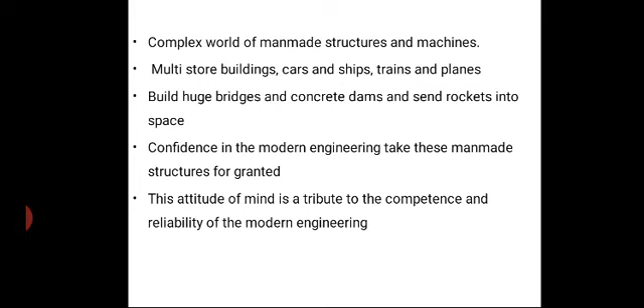This is our confidence in the modern engineering field, where man-made structures are taken for granted. This attitude is a tribute to the competence and reliability of modern engineering. This is the ability of modern engineering.

Now, for the analysis of stresses, the necessary thing is your mathematical analysis of stresses for regular bodies or regular shapes, right? But in complex components, it may not be so. In practice, all the considerations which we have made for regular geometry cannot be applied.

If there is no other way for an engineer to study the stresses, you need to have previously existing resources. But the new materials or the new designs in the practical world cannot be handled by our old techniques or old methods of stress analysis.

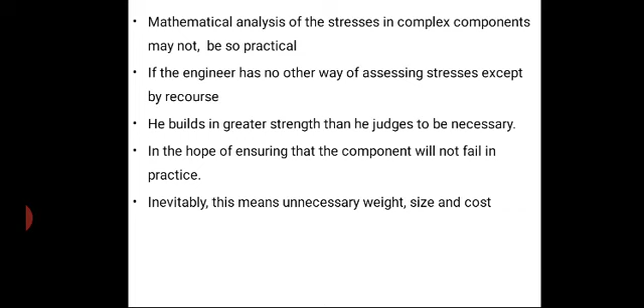Both weight and size of the component lead to high investment or material cost, which affects the total overall cost of the component, machine or other component. So it is very necessary to analyze the stresses in the components, and if we can determine the stresses in the component with minimum cost, then it is a feasible way. So in these conditions, we need to analyze the stresses in a component.

Stress analysis involves the 6 stress components, because we know what stress is. Stress is nothing but the internal resisting force for externally applied loads. When we consider a simple geometry like a circular bar subjected to an external tensile force F, everyone can say that stress is directly proportional to strain, or stress is nothing but force by area.

Now if I mount it in the horizontal direction, I can determine sigma x, the stress along the x direction. If I mount it in the vertical direction, I can determine the stress along the y direction. But for a 3-dimensional body, I need to determine the stress at different points. Then I'll consider the stress tensor, which involves the normal stresses as well as the shear stresses, in total 9 stress components.

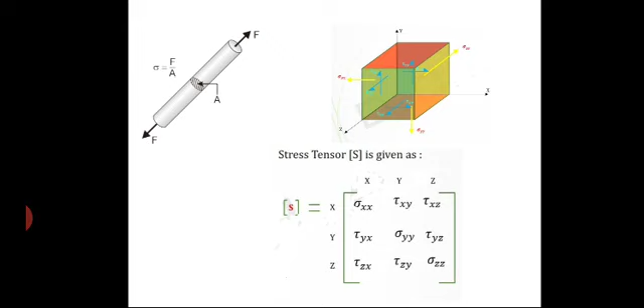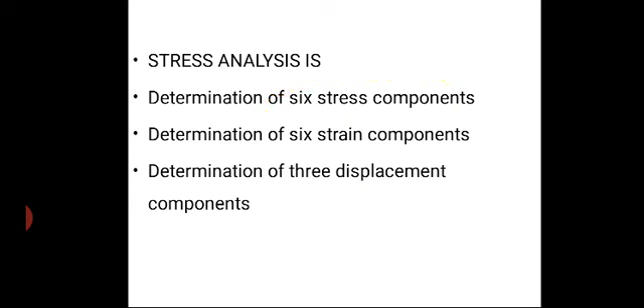But when we consider the symmetry of the stresses, the total 9 stress components are reduced to 6 stress components. Because of the symmetry, we only have 6 components. We have learned all this from our basic subject, strength of materials. Similarly, we can determine the 6 strain components in a body.

So if I need to determine the stresses at different points and different orientations, we need a lot of information, right? Even for a regular body, if I apply an axial load, I need to determine the lateral strains in 2 mutually perpendicular directions. Such a solution is known as a closed form solution.

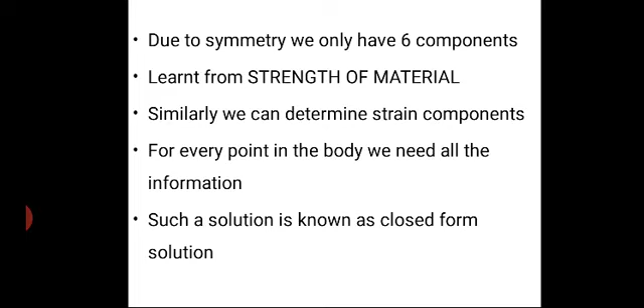Suppose I consider a problem like a plate with a hole of radius r at a certain point. In such problems, I cannot apply stress equals force by area, because the area may not be uniformly distributed, and we cannot say the stress is directly proportional to the applied load, because of the circular hole created at the center of the plate. So in these conditions, it is very difficult to get exact solutions.

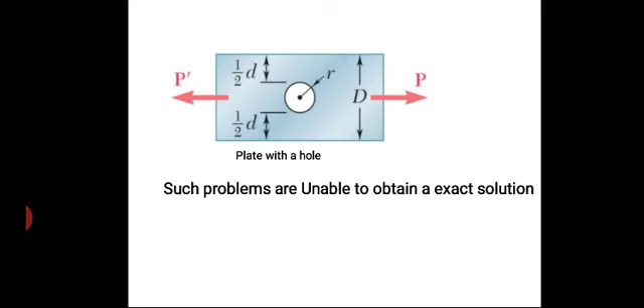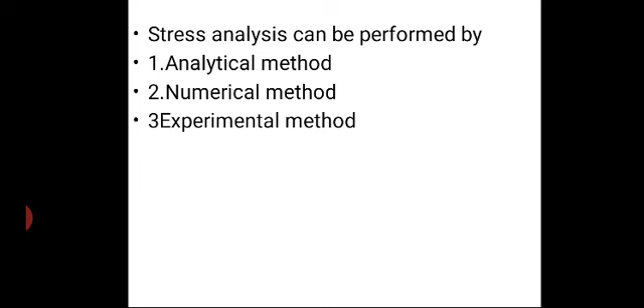So here there are possibilities of stress analysis, and this stress analysis can be done in 3 different methods: analytical method, numerical method, and experimental methods. Analytical methods are taken from our regular mechanics of machines or strength of materials, or even from theory of elasticity, where we are able to get a conceptual appreciation of the stress fields.

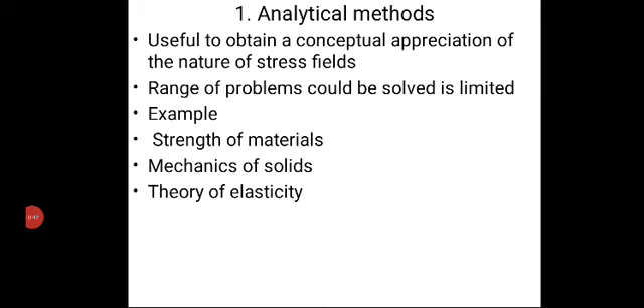But these analytical methods are restricted to solve only limited problems, regular geometry problems. They cannot be applied to complex geometry problems. Suppose I am considering a bar with axial loading and I am applying a torque, that is a combined loading. Or if I am considering a plate with multiple holes, our regular analytical techniques cannot be applied. Similarly, a beam which is being applied by a point load.

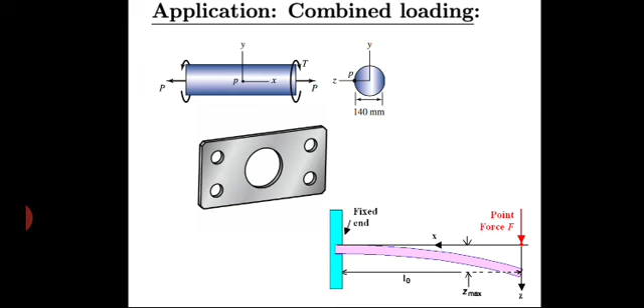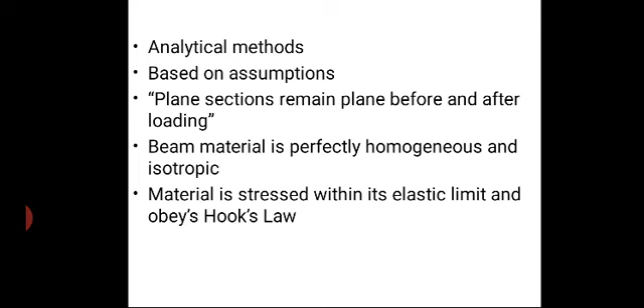Because all the analytical methods we are considering depend upon certain assumptions which we have learned from our basic MOM or SOM. Such assumptions are: plane sections remain plane before and after loading; the beam material is perfectly homogeneous and isotropic; and the material is stressed within the elastic limit and obeys Hooke's law. So analytical methods depend on certain assumptions and are limited to simple geometry and simple loading.

The second method is numerical methods, which provide scope for solving problems with arbitrary or complex geometry. The output results will be approximate values. You have learned this in your previous semester, finite element analysis. Numerical methods can be classified into three broad classifications: finite difference method, finite element method, and boundary element method. But these methods are validated by comparing the results with experimental techniques. Numerical methods alone cannot satisfy the requirements.

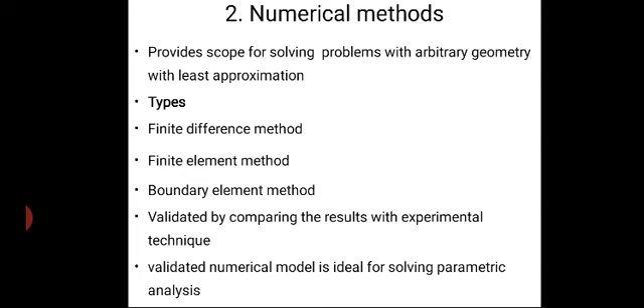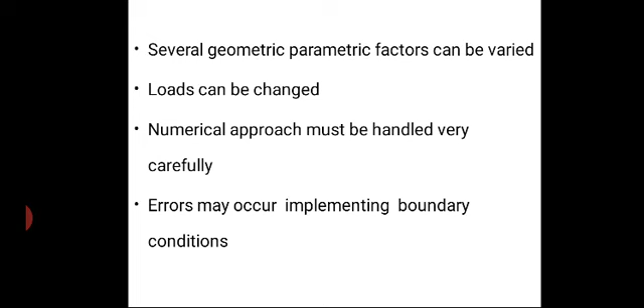Once it is validated with experimental methods, the numerical model will be an ideal form for solving any parametric analysis. This is the advantage of a numerical method compared to the analytical method. Once validated, several geometric parameters can be varied, and loads can be changed. One problem is the numerical approach must be handled very carefully, because it may give errors in the output values due to improper constraints on the body and improper locating of the nodes or key points. So the numerical technique alone cannot satisfy the requirements.

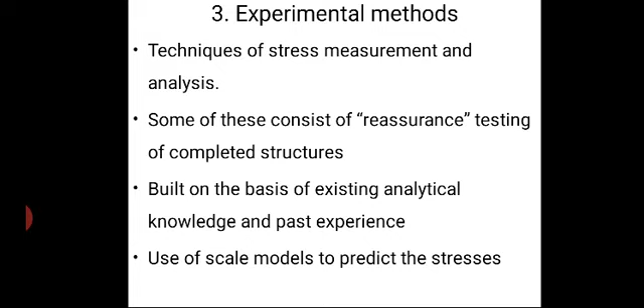To overcome this, we have the experimental technique. That is our subject, experimental stress analysis. These techniques of stress measurement and analysis consist of reassurance testing of completed structures, and the prototype of any body can be analyzed very easily, built based upon existing analytical knowledge and past experience. Large components can be scaled down and we can predict the stresses in the members.

Now let us consider one small example where a nut is tightened by a spanner. At the free end we are applying the load, and because of it stresses develop in both the nut and the spanner. For a clear picture of how the stress is distributed, we consider the material of both the spanner and the nut as epoxy. The stresses can be observed in the form of a birefringent pattern.

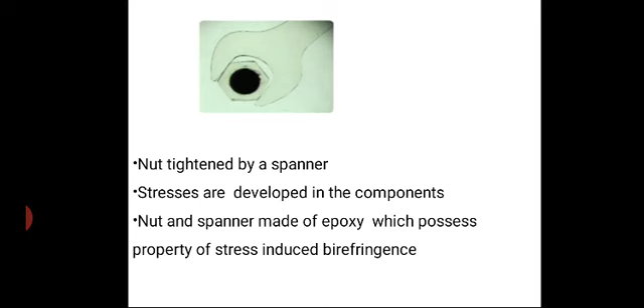You can observe how the stresses are distributed in the nut and the spanner depending upon the loading. As the load is increased from 1, 2, 3, 4 to the fifth loading, the stress patterns vary at different points. The stress concentration is maximum at this point, and you can see how the stresses are distributed on the outer surfaces.

This is the experimental technique, where we can practically analyze without implementing any formulae or numerical equations. Directly we can predict where the stresses are maximum and concentrate on these areas. Viewing the combined loading of the spanner and nut, the basic fundamental is from physics, that is optics, and we can observe the fringes developed in the components. These fringes indicate the amount of stress induced in the member.

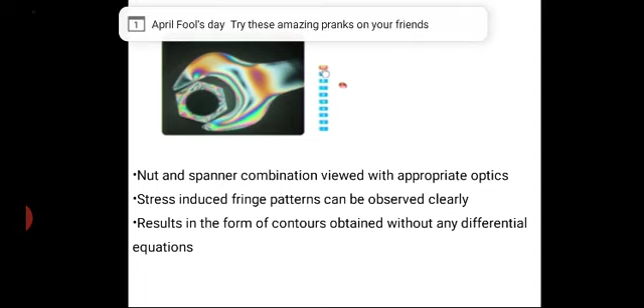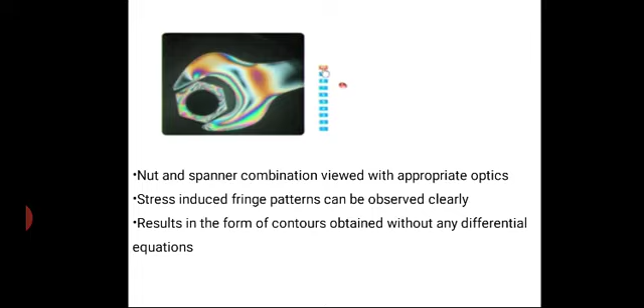The results can be obtained very clearly by observing the contours and tabulating these values without any differential equations. This is the advantage of experimental stress analysis. In the next class, we will discuss in detail what experimental stress analysis is.